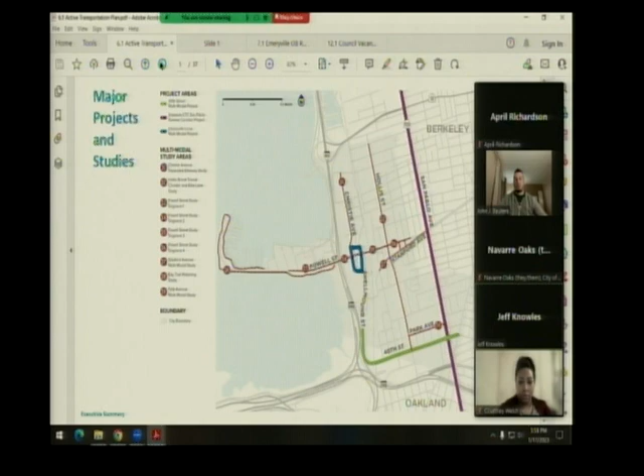In terms of bikeway mileage, what we have here are the different bikeway classes, and the columns are your existing mileage built today, what's proposed in this draft plan, and then the fully built network. I'll mention these numbers don't add together because in some cases your existing mileage is repurposed or reclassified for different bikeway types. This includes Class 1 shared use paths, like the Bay Trail or the Emeryville Greenway, where you have complete separation from people walking and bicycling from motor vehicle traffic.

We have 2.5 miles of new Class 1 shared paths proposed. Bicycle lanes are your standard striped bicycle lanes; there are no new Class 2 bicycle lanes proposed in this draft. There's a buffered bicycle lane designation, adding a little painted separation between the bicyclist and motor vehicle traffic, with 0.7 miles included. Class 3 bicycle routes are streets where it may be signed that the bicyclist is sharing the road with motor vehicle traffic; we have none included here.

We have 2.1 miles of Class 3B bicycle boulevards, which are traffic-calmed streets for people to mix with traffic. Then Class 4 separated bikeways—I mentioned this before, but this is really the marked departure from the most previous draft. The current plan has 5.3 miles of new separated bikeways. Separated bikeways have a physical separation between bicyclists and motor vehicle traffic, which could take the form of a planted median, concrete curbs, bollards, something that prevents vehicles from blocking the bike lane or impeding the bicyclist.

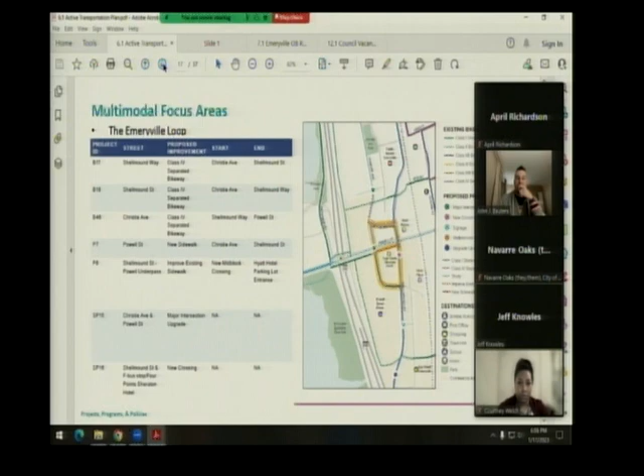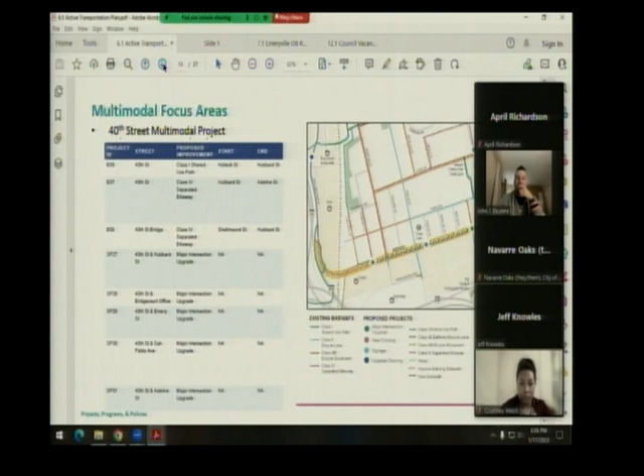Next slide. The same could be said for 40th Street. We know the city is already moving toward having this as a unified, complete project, but there could be some intersection upgrades along the way, so we wanted to make sure that was included and captured here. Next slide.

The same could be said for San Pablo Avenue as a major corridor. We wanted to note some of those major intersection upgrades that could either be part of the corridor project moving forward, which is a multi-jurisdictional project, or projects the city could carve out and take on as their own.

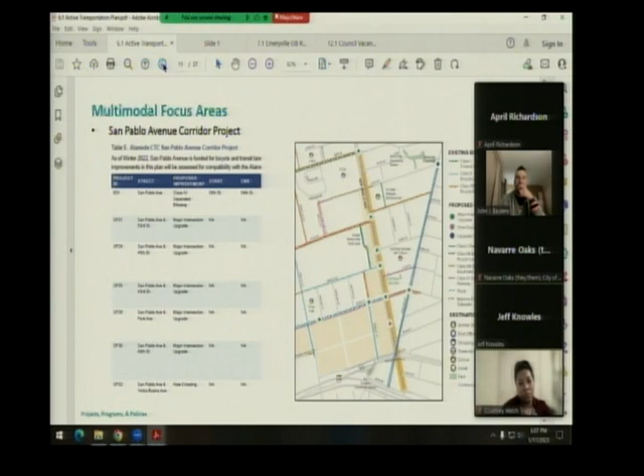Multimodal project studies: Christie Avenue is looking at trade-offs required to create separated bikeways. On Hollis Street, the study would look at potential bike lanes as part of the transit street, including sidewalk and pedestrian improvements. Powell Street separated bikeway study would examine the trade-offs needed to fit a separated bikeway, most notably what traffic impacts would result, plus undercrossing improvements in coordination with the MTC project for the Bay Trail connection.

Stanford Avenue separated bikeway study. Bay Trail widening study - this is something we heard loud and clear from current users, that the narrowness of the trail causes user conflicts, so we're looking at widening it, especially out toward the point. Park Avenue multimodal study looks at reconfiguring the current angled parking into perpendicular parking, freeing space to widen the sidewalk or include bicycle facilities.

Some of the focus areas are separated bikeways, the Emeryville Greenway and Doyle Street extensions, and leveraging street closures and shared use paths throughout the network.

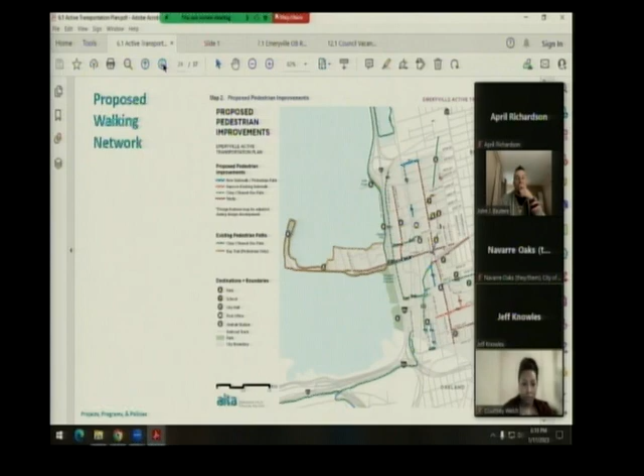Finally, in terms of infrastructure recommendations, we have spot improvements, color-coded and labeled. We have new crossings, upgrades to existing crossings, and major intersection upgrades, which include changing the geometry of different corners and creating protected intersections. In red, new traffic signals. In pink, undercrossing improvements - SP14 is at the Interstate 80 undercrossing to help make better connections to the Bay Trail.

And finally, signage. As a separate parallel track, the city will be pursuing an additional wayfinding strategy, which will move through the BPAC and the Transportation Committee this spring.

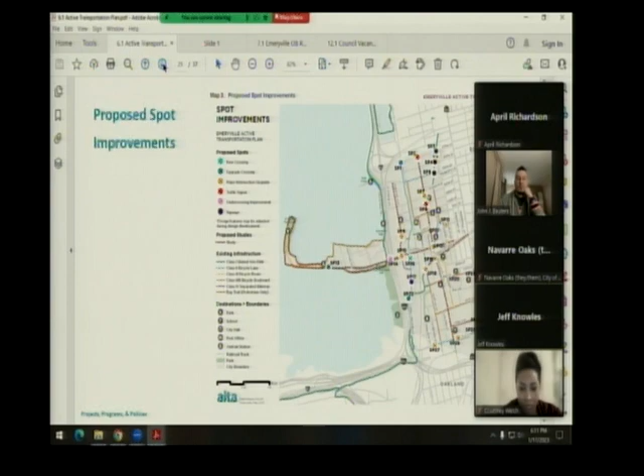There are programmatic recommendations in terms of equity, education, encouragement, and evaluation. Evaluation recommendations include continuing to require developers to provide vehicle, pedestrian, and bicycle counts, but also a recommendation that the city shall produce these counts before and after each roadway project in order to evaluate the effectiveness of investments - that's included in the draft plan.

Policy recommendations include commitments to high-quality bikeways, policies around maintaining existing and future facilities, safe routes to school, and evaluation and enforcement.

Chapter 5 is how we get this built - implementation and funding.

It's important to note the project delivery process and where we are. The city-wide active transportation plan is really a blueprint and wish list for the city. It includes every conceivable project that we think is feasible.

The next step is really to go out there and find funding. So the city, working through its capital improvement project budgeting process, will prioritize projects together and go seek funding. That's the first phase of budgeting.

Once you get the funding in hand, you go through a planning and engineering analysis phase. You develop a preferred alternative or final alignment, then a conceptual design, then a detailed design. You get through your environmental clearances, then you move into construction and maintenance.

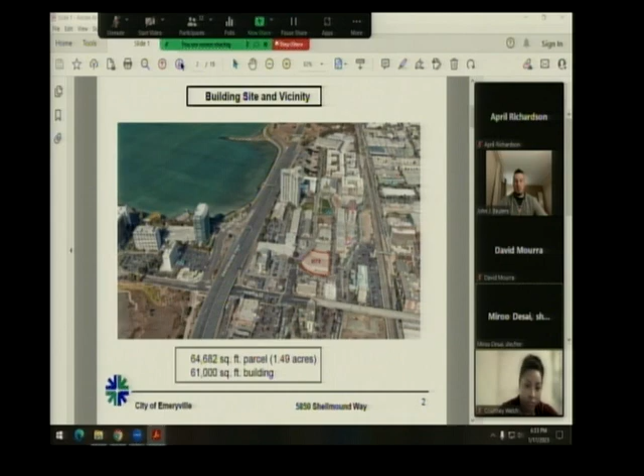Next slide, please. So the council and the commission has been seeing this proposal for the last year and a half. There have been 4 planning commission sessions, and this is the second city council session. The key issue to be discussed here is the mix of uses.

Next slide, please. The parcel size is between 1 and 5 acres, our regulations require a mix of uses where one use must be residential. Our regulations do not specify the proportion of the mix between residential and non-residential uses, and it is up to the discretion of the commission or the council to determine whether the proposal qualifies as mixed use.

Next slide, please. So when the applicant first came in, they were only proposing a life science tower. When questioned about why no residential, they discussed the financial infeasibility of residential uses at this site. Further discussions revealed, on the third study session, they included the tower with 6 townhouse units. This proposal was also shown to the council in their first study session. The fourth study session has now upped the residential units to 30. And this is the proposal that is going to be reviewed by the council at your study session today.

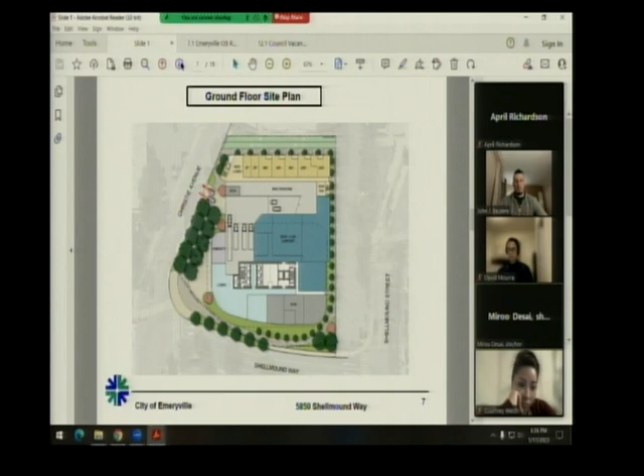Next slide, please. This is sort of the ground floor site plan. The lobby is at the intersection of Shellmound Way and Christie Avenue, and this is the lobby of the life science building. The vehicular entry is off Christie Avenue. The residential units are located along the northern property line.

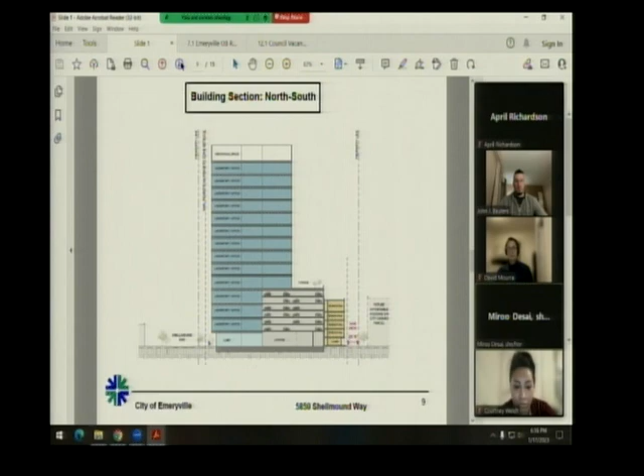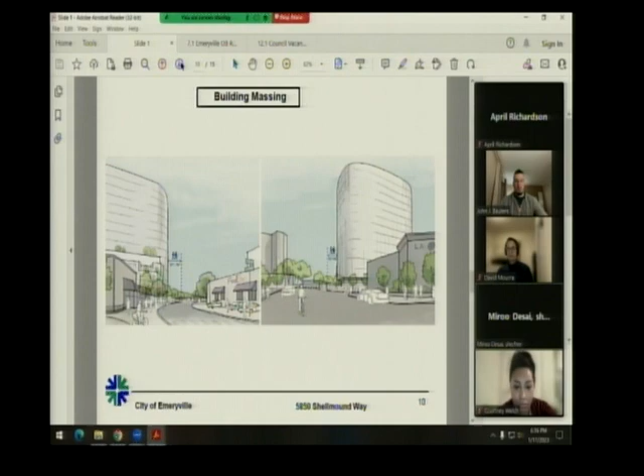Next slide, please. This is the preliminary building massing, and the applicant is probably going to show a few more pictures regarding the massing. Next slide, please. So in terms of the key development standards that the project has to fulfill regarding FAR, height, and density.

So this project will require 100 bonus points for FAR and 100 bonus points for height. They do not need any bonus points for residential density. As a reminder, for bonus points on non-residential projects, the applicant needs to obtain half the bonus points by paying an additional affordable housing impact fee, which calculates to approximately $3.5 million if a building permit were to be issued for this project today. The remaining 50 bonus points are earned through provision of community benefits. At this time, the applicant has identified additional public open space and additional family-friendly units for obtaining the 50 community benefit points.

In terms of parking, the project proposal complies with the city's parking regulations. Note that this is also under the transit hub overlay zone, which reduces all required parking by half, and the project does comply with our regulations. In terms of bicycle parking, what is required is 71 short-term and 99 long-term spaces. At this stage, they are showing some spaces where bike parking is provided, but these details will be sorted out as the project moves forward.

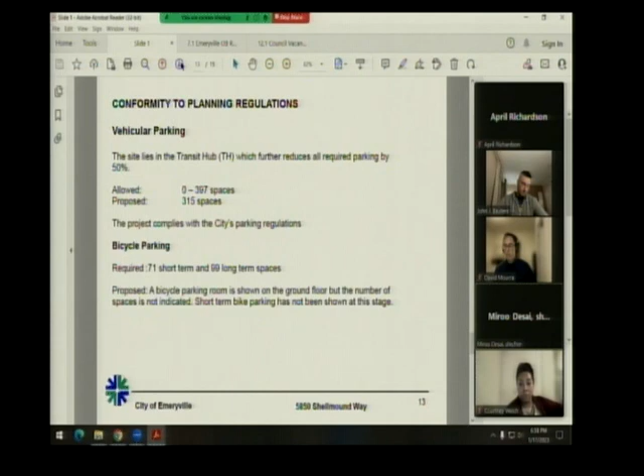The last time the Planning Commission saw this specific project, with the Life Science Tower and 30 affordable units, was in October. The Commission felt that a good faith effort had been made to increase the amount of housing in the project from 6 to 30 units, and felt that the massing consideration of the project had moved in the right direction. There were some other comments regarding transportation assessment, bicycle parking, as well as design of open spaces.

One commissioner mentioned an interest in exploring increasing the number of residential units by adding ADUs, as ADUs do not count towards FAR. During the Planning Commission discussion in October, when there were comments regarding why 30 units and why not more, the discussion related to the fact that if they were to add more housing units, then they would not be able to meet the FAR.

However, the point here is that ADUs do not count towards FAR, and therefore ADUs could be proposed in this project. In terms of what the council saw back in May, when they had shown a Life Science Tower with 6 units, the council was pretty unanimous in saying that the 6 units was not enough, and therefore the mix of uses was not appropriate.